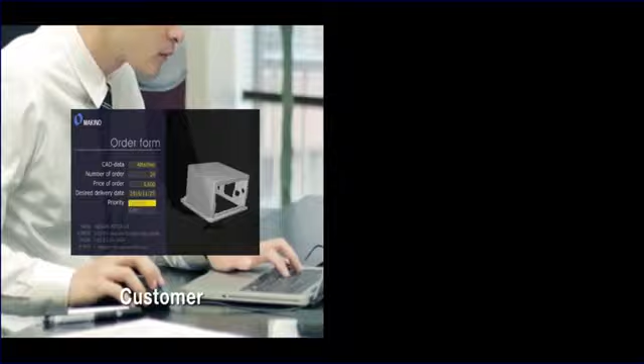This movie shows Makino's future concept to maximize capacity utilization of your factory. In Japan and all over the world, there are no ways to avoid manpower shortage because of global population decrease. How can we produce the same or more with fewer workers?

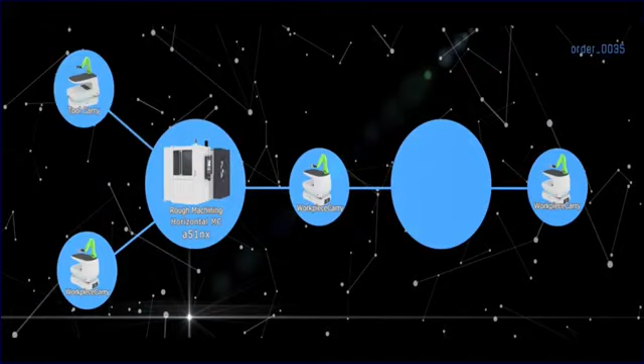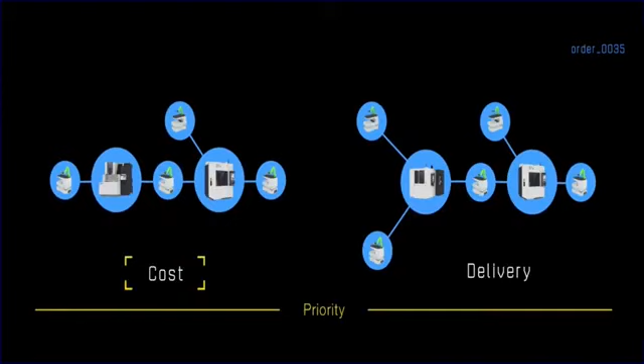In all fields of industries, digitalization and computer technology have been developed and introduced day by day. So what can Makino suggest to improve efficiency at your facility? This is our suggestion.

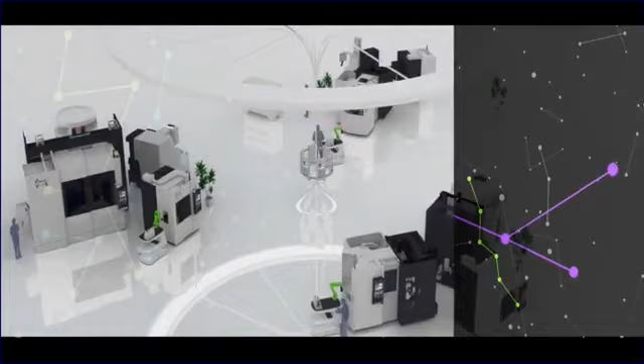The system alters the daily schedule in real time to maximize the factory's overall capacity. You may think this is futuristic, but artificial intelligence changes and analyzes the schedule and takes the best production method one by one.

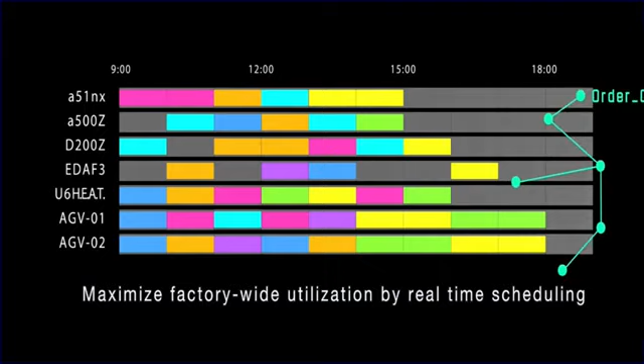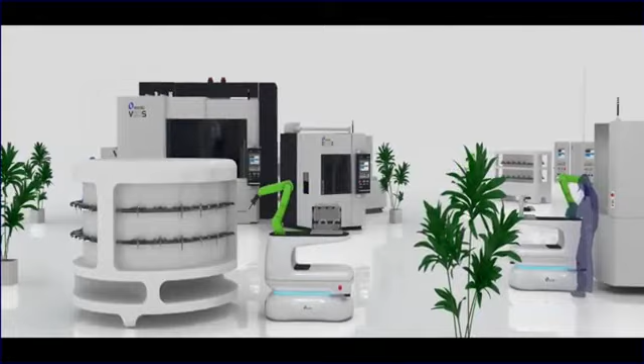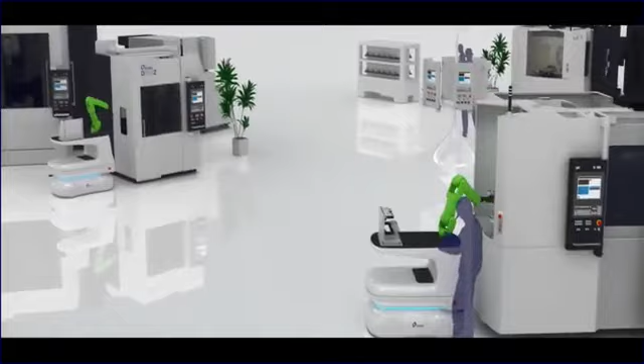For example, after the production system chooses the best way of manufacturing, the robot with AGV chooses the best tool from the tool database, then automatically puts these tools into the machining center. Such simple labor is replaced from human to robot. Not only tools, but workpieces are also delivered by this AGV.

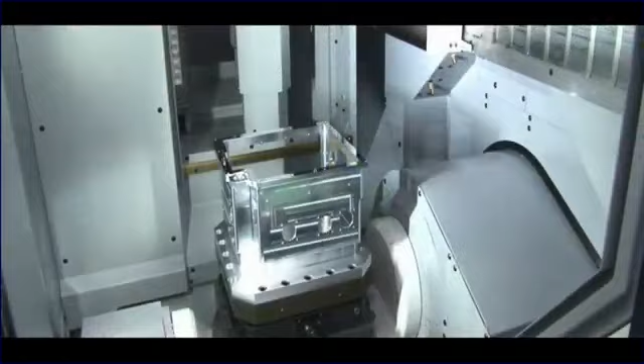If you have old machines which do not have an automation door, do not worry about that. The robot opens the manual door, then sets up the workpiece. We recommend using 5-axis machining instead of 3, because a single setup solves every machining process.

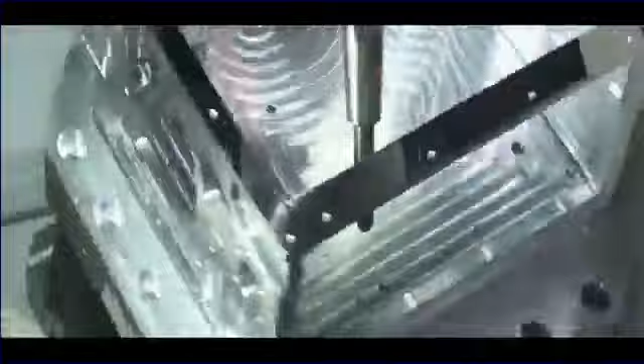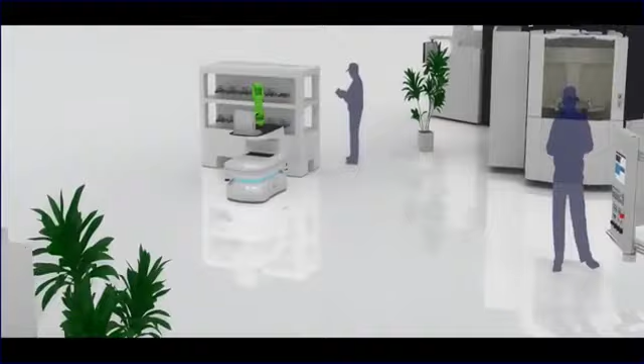This is Makino's target and future of production maximization. We are working day and night to introduce this system to customers.

The system is not released yet. However, we keep working to meet the customer's demands. That sounds like a too futuristic and vast theme, but this is the Makino MES concept, a production system against understaffing.

Here is the second theme, automation. I made a subtitle: Inside Machine Measurement Enables Consistent Long Time and Precise Machining. The most important point of automation is not introducing robots and AGVs.

The important point is that the machine itself can detect when the machining is neatly done. So I would like to explain milling operation, sinker EDM operation, and wire EDM operation, showing how Makino suggests the method of inside machine measurement on these three machining types.

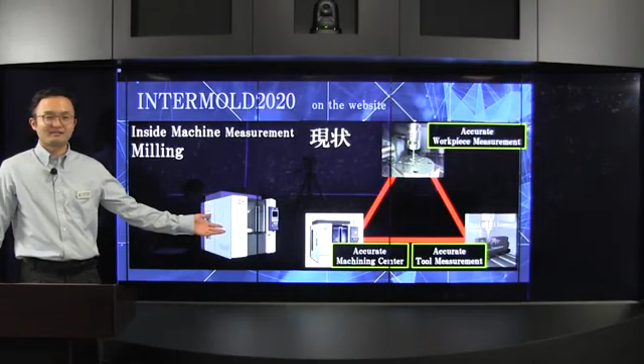Not only the machine, but also workpiece measurement system and tool measurement system are provided as options to secure the machine's accuracy. However, there is a problem.

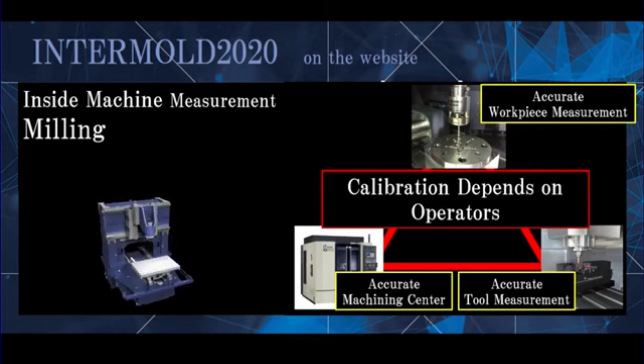All these three machines and devices' calibration depends on the operator's labor. So some operators may hesitate to do that because all the responsibility for accuracy is on the calibration. Some less skilled operators even don't know what the calibration is.

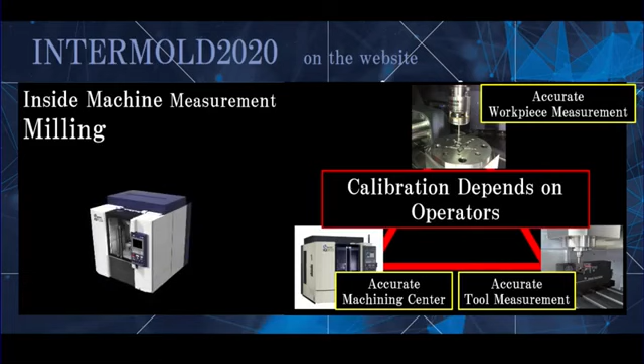So we are thinking about how we can automate this calibration. Here is the automation of calibration.

You can see the sphere is attached on the table, and the sphere is attached on the sensor to detect where the center of the workpiece measuring probe is.

As I said before, some operators may hesitate to do the calibration because it takes lots of time and skill to achieve high accuracy. However, Makino developed software and hardware which enables, with a single button press, calibration of all the devices.

But the calibration is a very necessary step to achieve plus minus 1 micrometer, so it should not depend on the operator's skill. Therefore, Makino developed its own technology to automate this.

Now the machine changes the tool. Then the tool measurement device detects the center point of the tool. Therefore, the machine can detect where the center point of the tool is to achieve plus minus 1 micrometer accuracy.

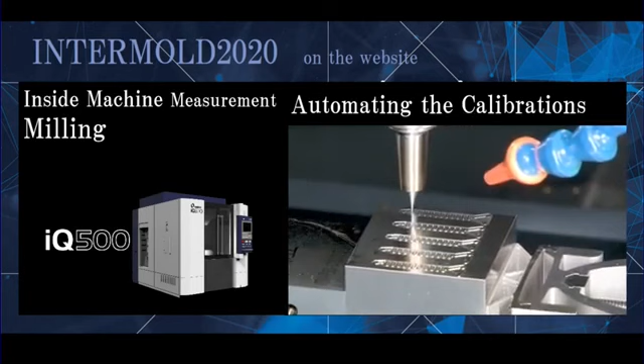This is high speed cutting. The feed speed is F2000. The tool diameter is very small, 0.5 millimeter, using a CBN tool with radius R0.05.

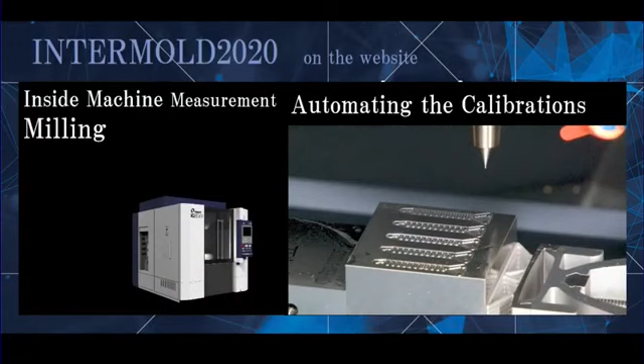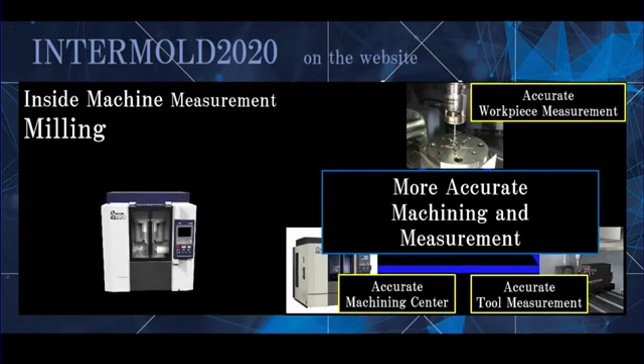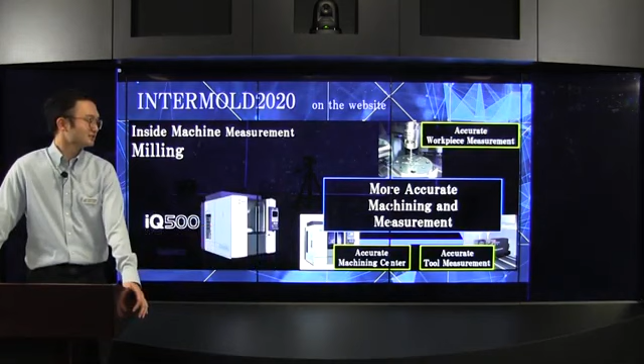Now you can see this blue triangle. After automating the calibration of workpiece measurement device and tool measurement device, it enhances and draws out the performance of accurate machining center. So you can realize more accurate machining and measurement.

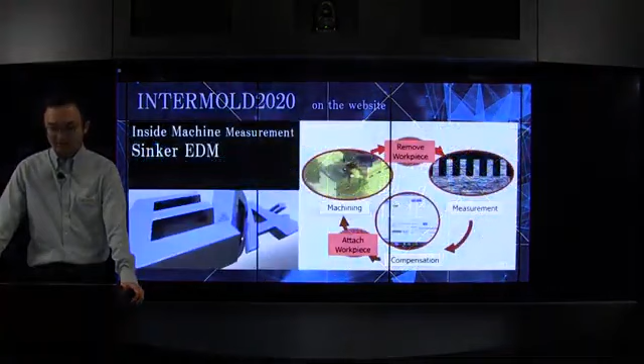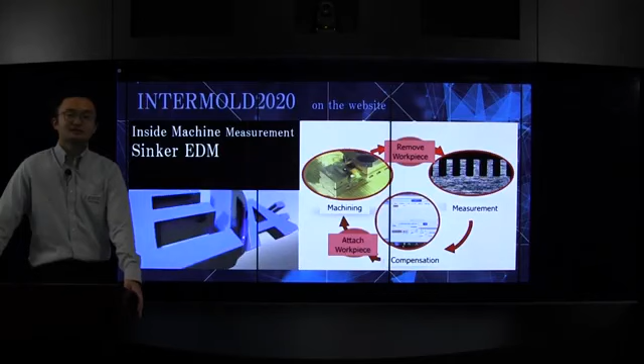The next one is sinker EDM. This is our small sinker EDM EDAF3. Especially this machine is popular for the connector die industry, which requires very severe pitch accuracy.

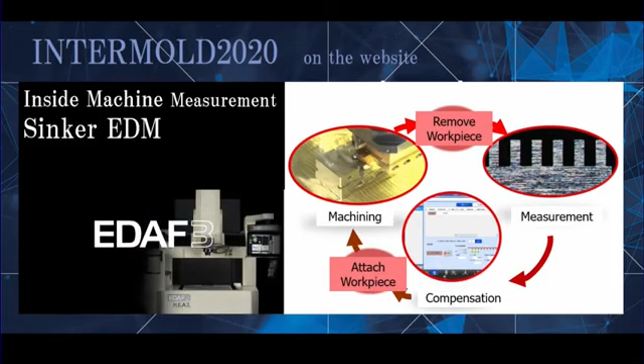However, this machine has a problem. After machining, before the final finishing of 5 micrometer depth, the operator stops the machining, removes the workpiece, then measures how much more to machine. Then adjusts the arcing setting depending on the operator's skill, then resets the workpiece, then machines again. After repeating this cycle, it takes lots of time, and the result depends on the operator's skill.

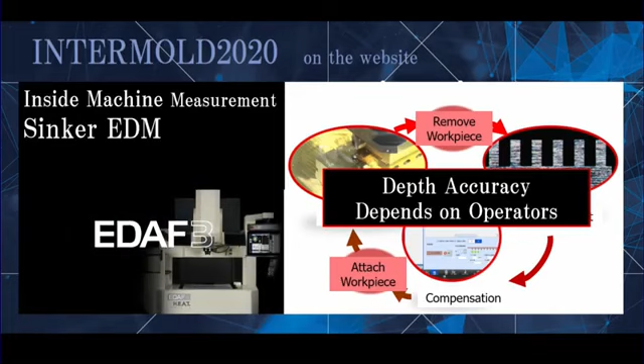So how can we realize consistent depth accuracy? This demonstration shows how Makino's machine detects the depth accuracy.

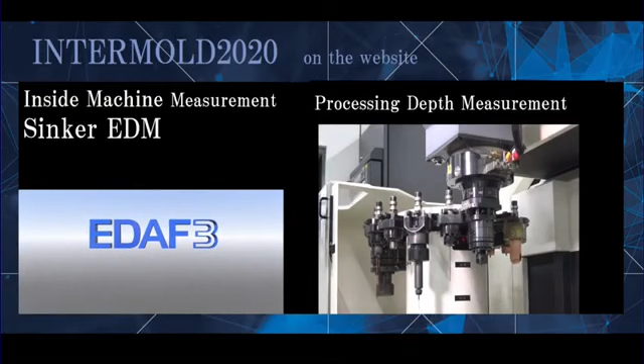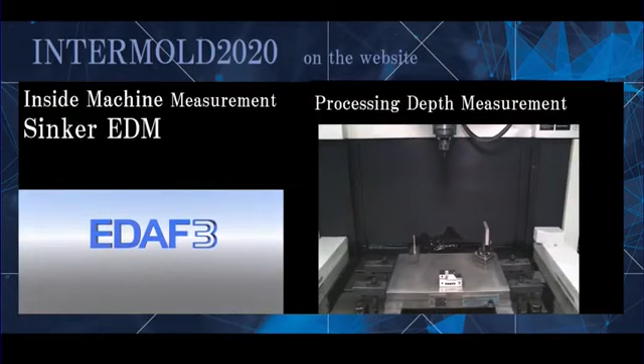For example, the connector die only has 0.3 or 0.5 millimeter pitch on each peak of the mold. Therefore, the machine forms the probe by itself. You can see that this probe is approaching the workpiece. It is a very, very small diameter probe.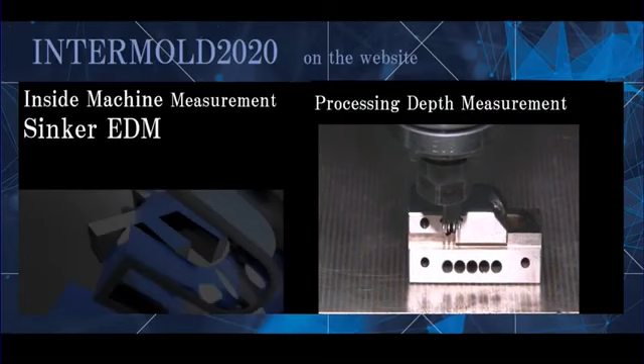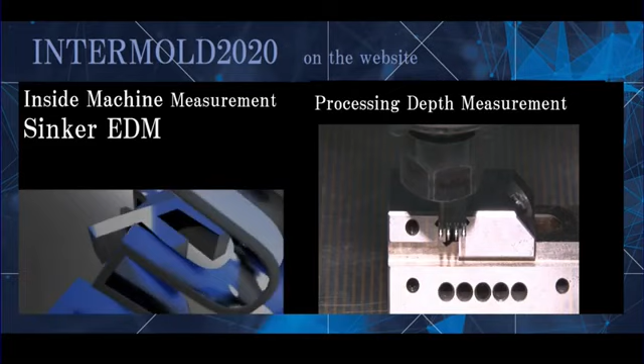Because this is sinker EDM, it is not necessary to be physically contacted to the workpiece. If there is physical contact, the probe easily breaks off. Once the machine detects the conducting of electricity, it automatically detects how much depth is left to reach the perfect condition.

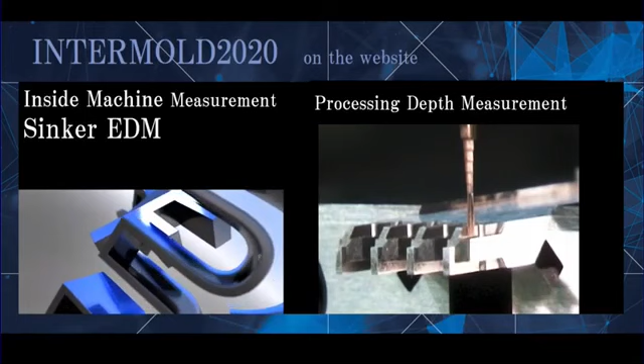After detecting how much to be machined, Makino applies its experience to do slightly additional machining. So if 5 microns or 3 microns are left, the machine automatically detects the value, then optimizes the setting to make this additional machining.

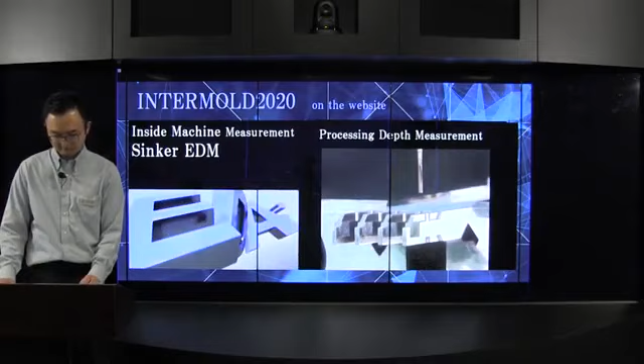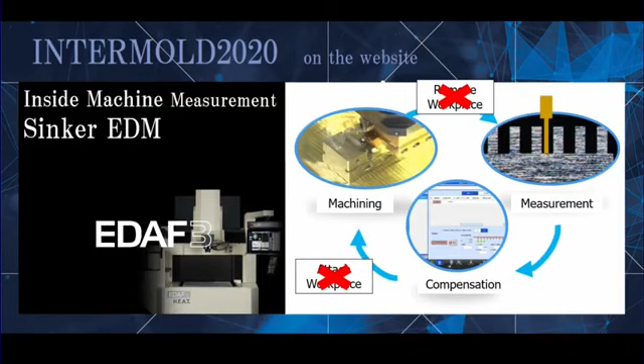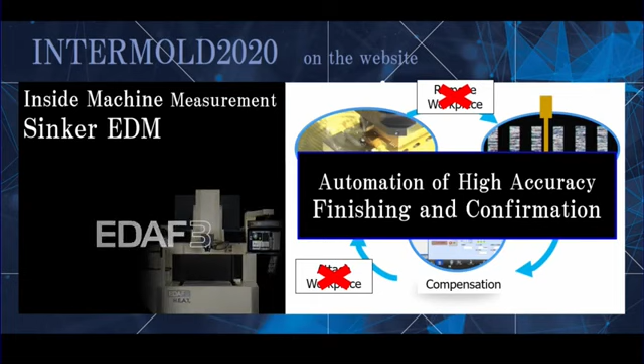So you do not have to remove the workpiece one by one, and you can leave the final machining to this sinker EDM. Therefore, automation of high accuracy is realized. Then the machine automatically confirms if the workpiece machining is done or not.

Finally, I would like to explain about the wire EDM machine. This is the UP6 HEAT. This is so accurate a machine that can aim for plus minus 1 micrometer pitch accuracy.

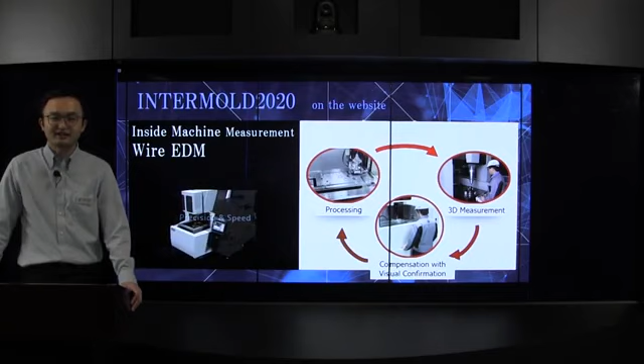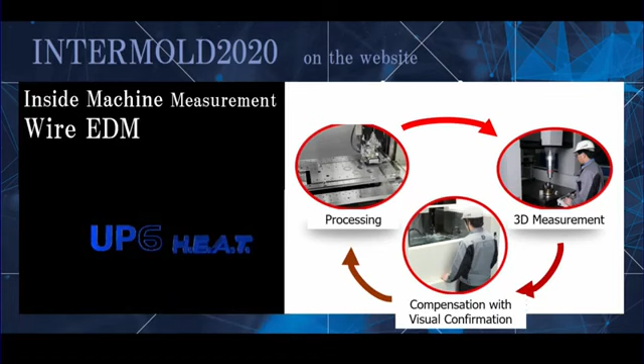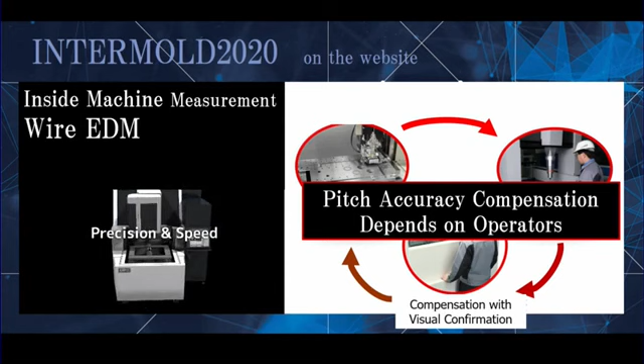That means the pitch accuracy compensation depends on the operator's skill. So how does Makino eliminate this manual adjustment?

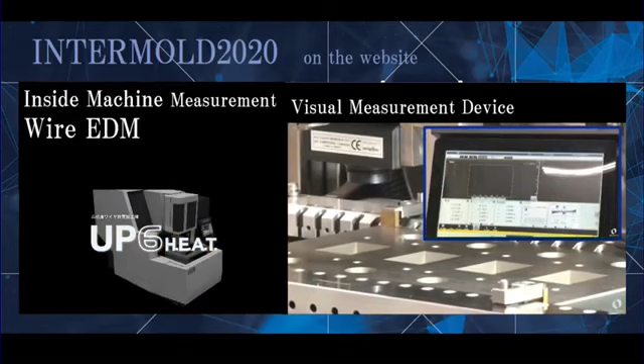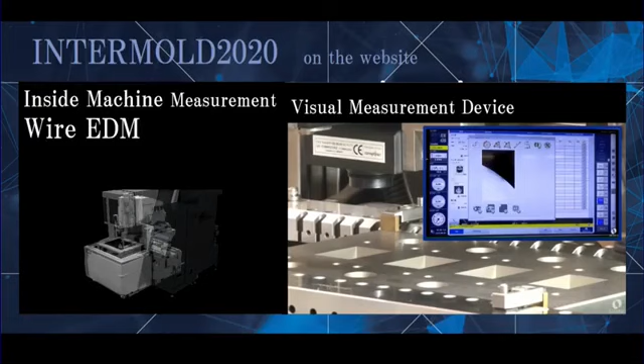There is a visual measurement device attached to the machine's head, and the machine head moves the same path as the machining. The reason we use a visual measurement device is that sometimes the workpiece pitch is too narrow, so the work measurement probe cannot get into the space.

This is why we adopt this visual sensor, and as I said in the sinker EDM section, we have a technology of slight additional machining. So once the detection device tells there are 2 or 3 microns of additional machining needed, the machine automatically adjusts the condition, then does the rest of the job.

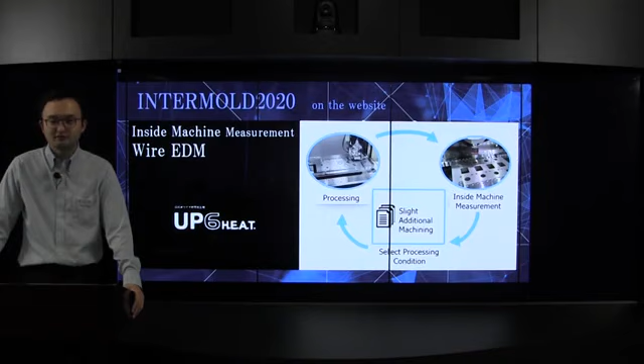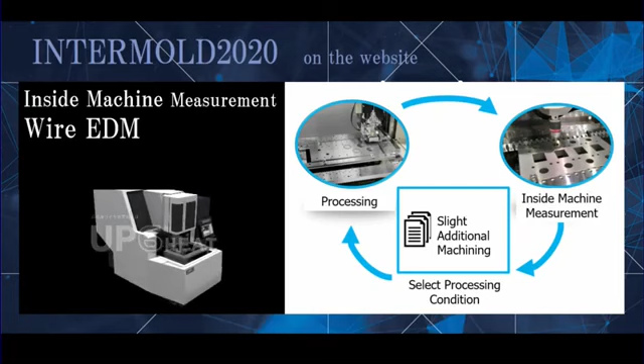So here is the cycle. You do not have to remove the workpiece from the machine. For inside-machine measurement, on the picture there is a probe, so you can select whether to use the visual image sensor or the physical contact probe. After detecting how much more needs to be machined, the machine automatically selects the best condition to make slight additional machining, then finishes the workpiece.

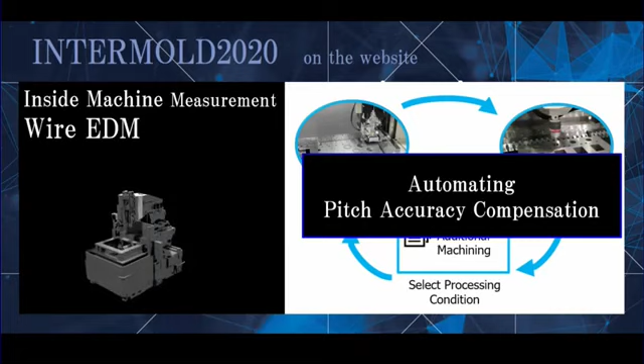That means we automate the pitch accuracy compensation. So I introduced the automation of 3 machines in terms of inside machine measurement.

Now I would like to introduce the last theme: facilitation. No matter how we introduce the automation system, the final user of the machine is human. So we are always thinking about how we can make easy and friendly machines and technology as a mold making tool.

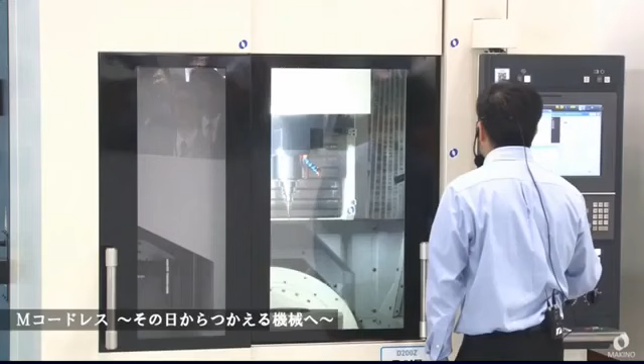This is our latest technology called Athena. You can see the demonstration of voice control. The operator tells the machine to unclamp the tool. Then the machine unclamps the tool.

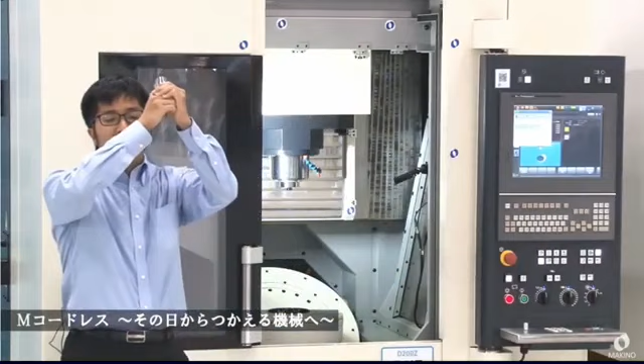Even if the operator's hands are both occupied, you can manipulate the machine with voice. Not only voice commands, but Athena also tells the operator which items to set up. This is especially easier for beginner operators to manipulate the job before pressing the start button.

Next is the 5-axis technology. There are lots of difficulties with 3-axis machining. The tool can be very long in this case, and the surface finish will be bad because of chattering, and also the tool life becomes very short.

So we recommend using the 5-axis machine, which can tilt the tool to realize better surface quality.

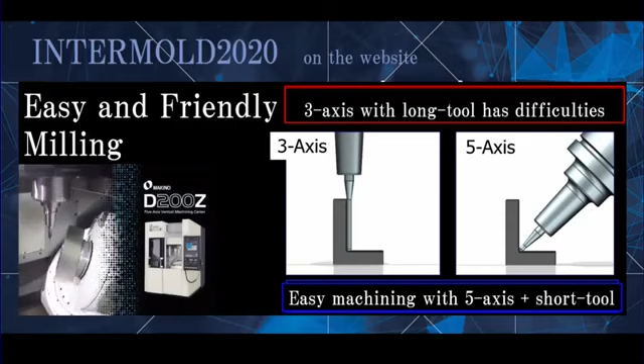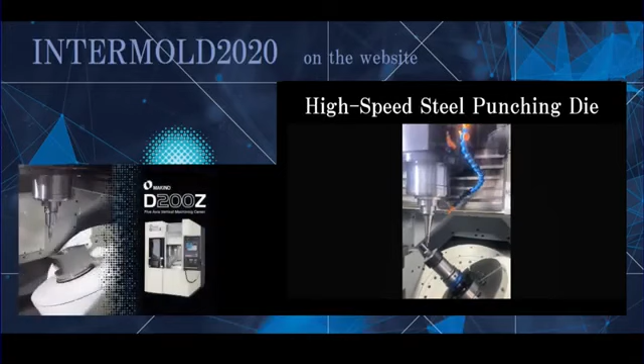Also, the 5-axis machining makes your job easier. For example, this is the video of D200Z, our vertical 5-axis machining center. What the machine is making is a high-speed steel punching die.

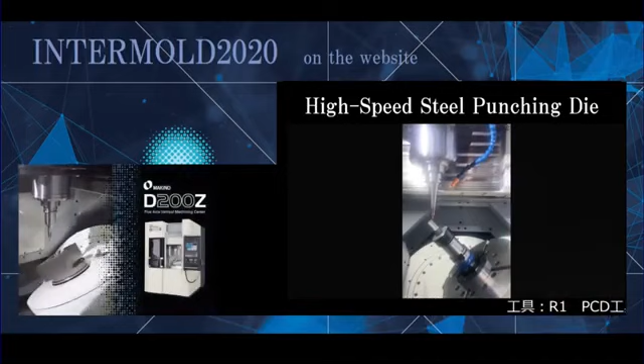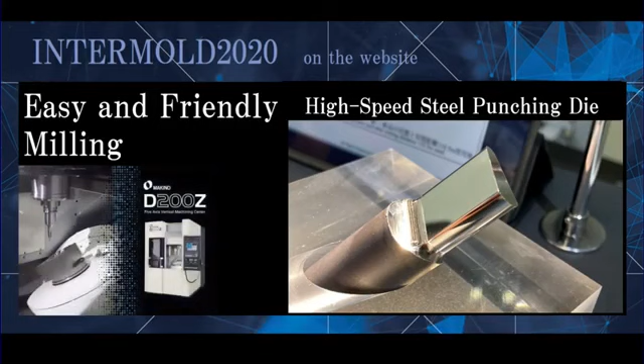The workpiece is 60 HRC, and the workpiece size is 20 by 100 mm. The tool is a PCD tool, sintered diamond. This combination realizes a very beautiful mirror surface finishing on the punching die. It is almost a joke to make the same workpiece with 3 axes.

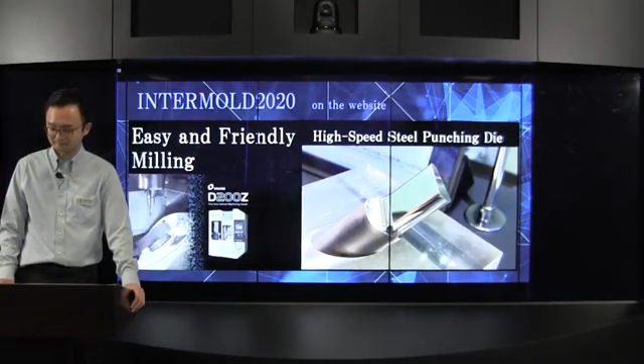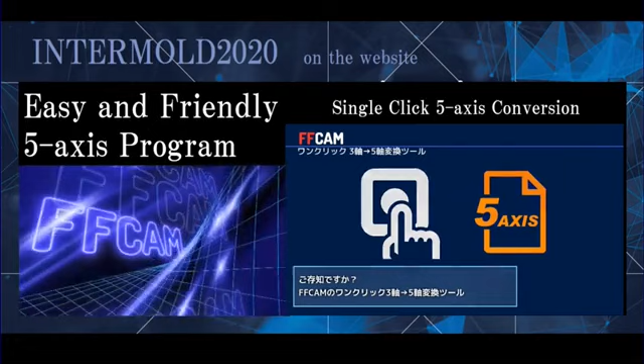So you may think 5-axis machining is difficult. The most difficult point is making the program, I think. You have to avoid the collision of workpiece and machine, and also 5-axis programming needs more experience to make.

We have a solution. This is FFCAM, the Makino-developed CAM software. It automatically converts the program from 3-axis to 5-axis with a single button press. So you can utilize your existing 3-axis program into a 5-axis program, then introduce it to the 5-axis machine.

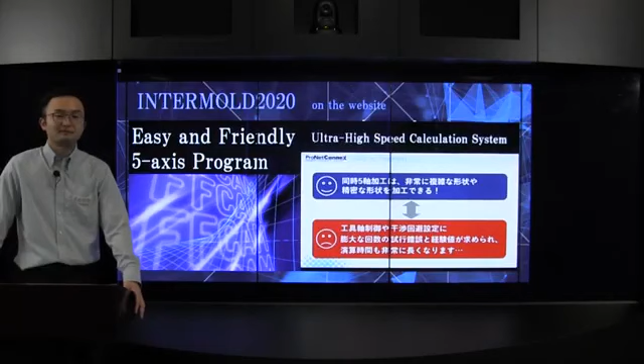Also, the biggest concern is taking time on the calculation. Makino's FFCAM has a solution for this. We have an ultra high-speed calculation system utilizing a cloud server for calculation.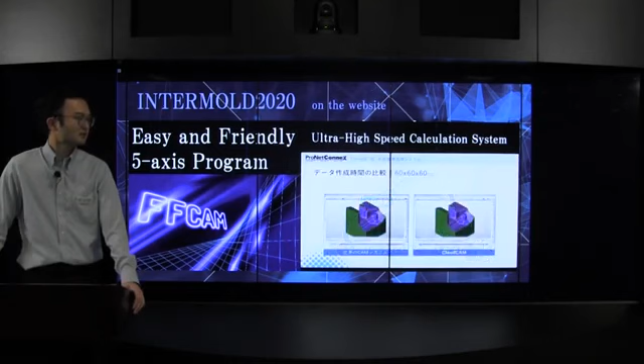So there is a comparison between the conventional calculation and cloud CAM calculation. Once the data is uploaded on the cloud server, the supercomputer processes the path conversion. It is uploading the data and converting the program to 5-axis right now, then downloading the data from the cloud server.

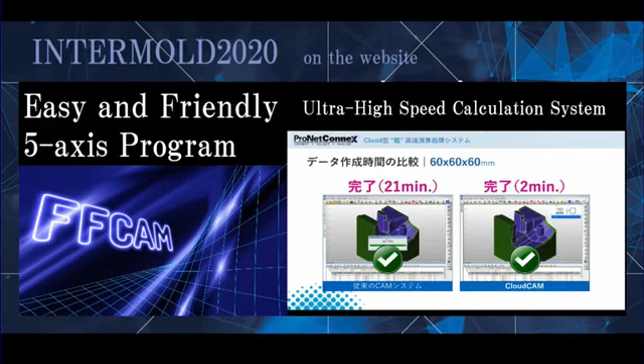It only takes 2 minutes, so you can do trial and error as much as you want. On the other hand, the conventional method takes more time. Let's see how much it takes. 21 minutes. That means this ultra high-speed calculation system is 10 times faster than your computer's calculation.

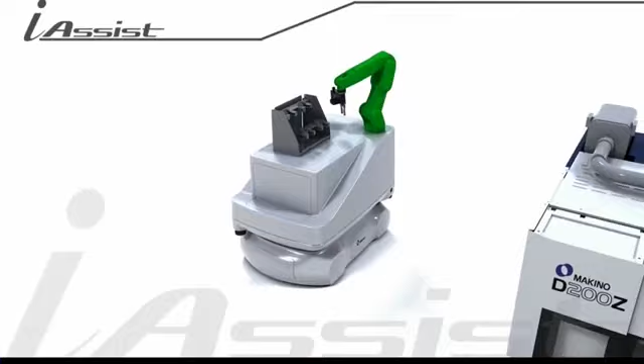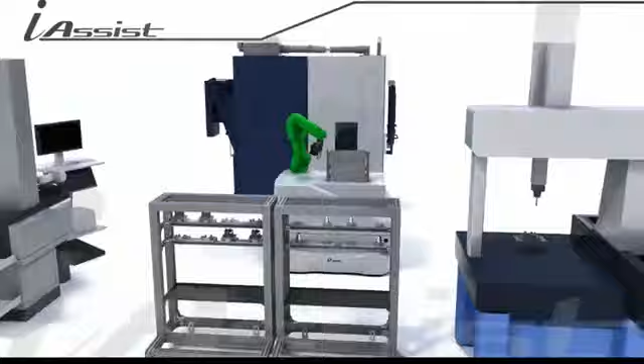Lastly, I would like to introduce the teaching-less automation system, iAssist. At our previous exhibitions, you may have seen some demonstration, but let me introduce it. This is the iAssist overview. We connect the machining center, tool presetter, and 3D measurement device.

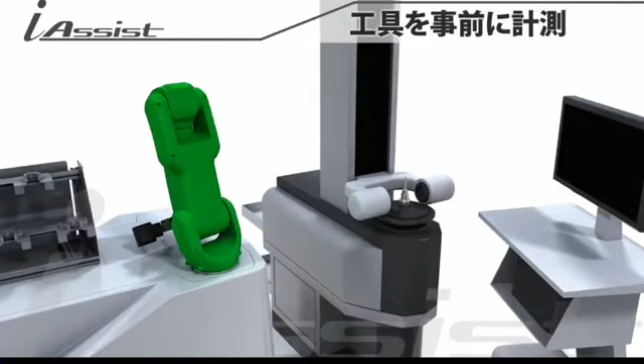So this robot is a cooperative robot which does not require a safety fence, and this is an automatic guided vehicle, AGV. You do not have to make teaching; the only thing to indicate is move from point A to point B. After measuring the tool, the robot picks up the tool, then delivers it to the machining center. So this simple labor is replaced from the human to this robot and AGV, iAssist.

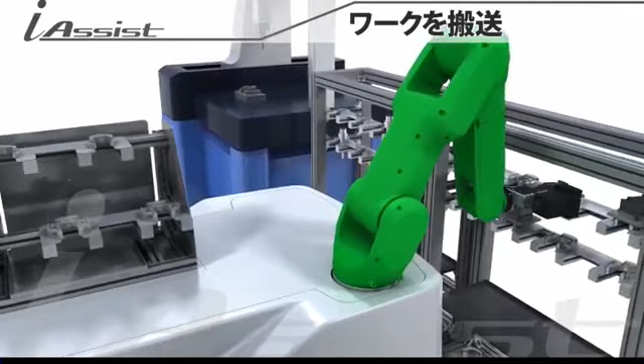This AGV has a radar to detect what is in front of the vehicle. Once the system detects a human or obstacle, it automatically avoids these obstacles and makes its way.

Such a complex system needs a very high skill of integration. However, they think by themselves—they are autonomous. So you do not have to spend such time, and you don't have to pay for an integrator to introduce this system.

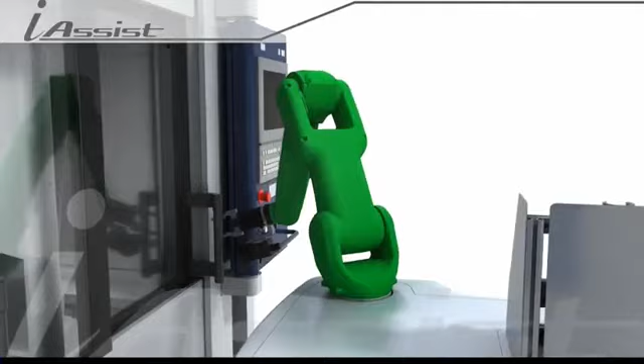As you can see in the first video, the robot opens the manual door, what the operator usually does. That means you can integrate the old, existing machine into this iAssist system. No matter whether the machine has an automation door or not, this AGV and robot automate the workpiece setting.

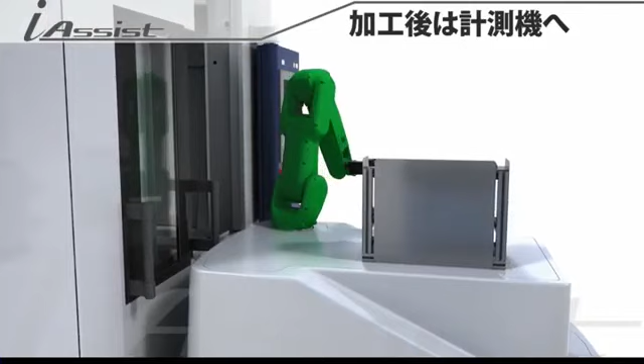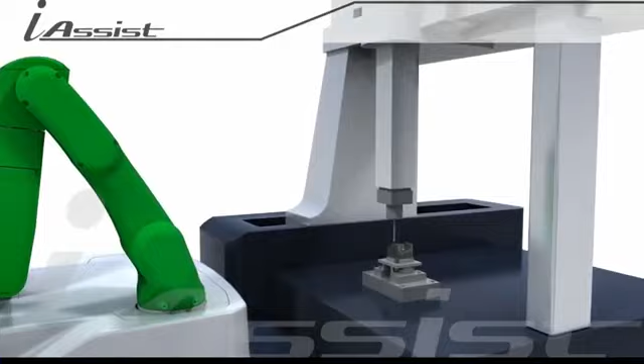After the machining, this robot picks up the workpiece, then delivers it to the 3D measurement machine. As I said before, the key point of automation is confirmation of the result. If the system sees the workpiece is completed, it will be fine. But if it is not, iAssist picks up the workpiece, then sets it up on the machining center and repeats the cycle without humans' intervention.

So this was the third theme, facilitation—easy and friendly mold making tools. I introduced three themes: Makino MES concept, automation, and facilitation.

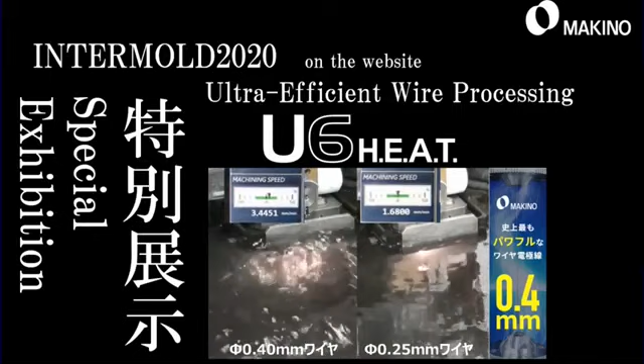Also, we are going to exhibit ultra-efficient wire processing. What the ultra-efficient wire processing is, we adopt a 0.4 millimeter diameter wire. The conventional wire thickness is 0.25. However, this 0.4 millimeter can cut twice as fast as the conventional wire. No other wire competitor adopts this 0.4 because the wire is too thick and hard to feed inside the machine, but we developed a new technology to enable the use of 0.4 millimeter wire.

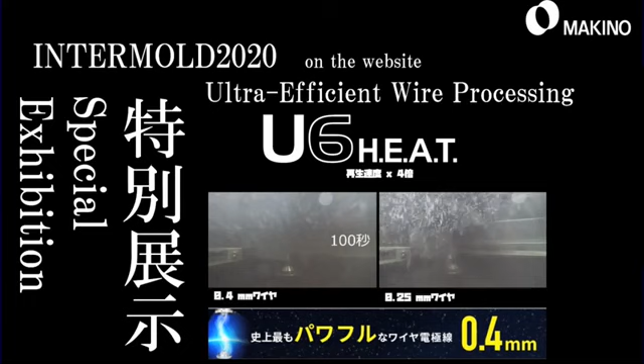For example, you can see the comparison. The 0.4 millimeter wire only takes 100 seconds to cut the workpiece. On the other hand, the 0.25 millimeter wire takes 200 seconds to cut out this workpiece. That means this 0.4 millimeter wire is twice as efficient as the conventional wire.